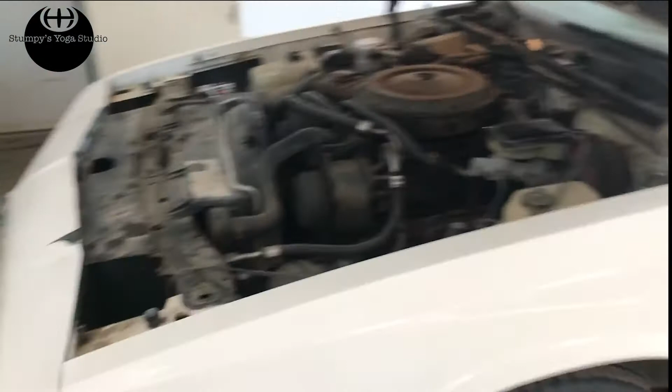Are you happy, Neil? I'm happy, Angus. Real happy. Oh, you can still hear it a little bit. But I think it goes away when it warms up. No, it's still running. Or maybe not. We gotta move it, then I can move my truck. And then you can put the car here.

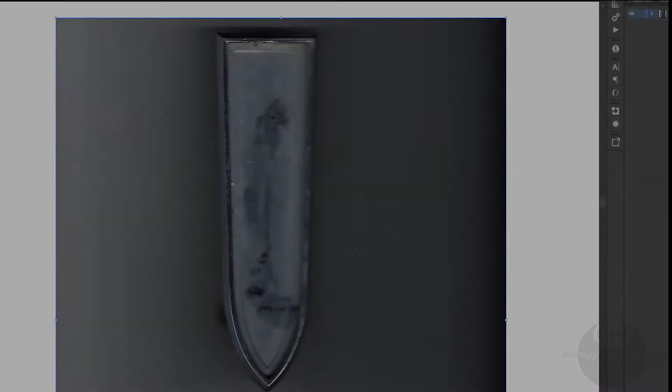This week we're doing something a little different. We're back at the computer again. What you're seeing on your screen today is that I'm working - that's the medallion of the front grille of the '64 New Yorker. I took it off when I was at the property last week, when me and my brother were working on his car.

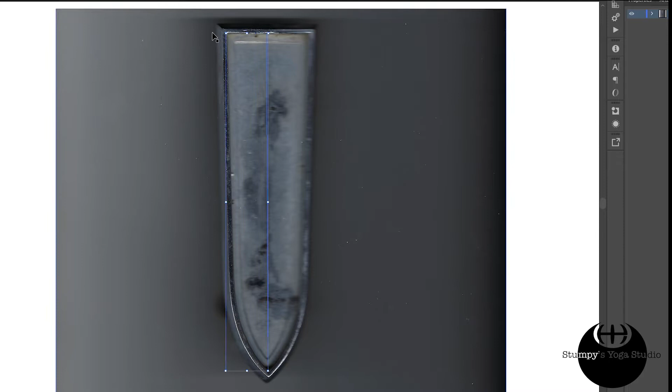I wanted to bring it back because all these medallions are missing the insert that goes in here. Instead of trying to track one down, which I think would be very difficult and rather expensive, I decided I'm going to try to 3D print one. So I'm not an expert at this yet, but I am working with it a little bit.

What you're seeing on your screen is me working in Adobe AI, Adobe Illustrator. What I did is basically take the medallion, put it in our family scanner on top of our printer, and just take a really rudimentary scan of the item. You can see some of it's blurred out, but what I'm doing now in Adobe AI is taking basically a shape of what I need, and I just took half of it because you can flip it and get a symmetrical shape.

So right now I'm in Fusion 360. This is the CAD software - there's a few other ones, there's SolidWorks and some other stuff, but this is the one I'm familiar with. I'm not saying it's the best, but it's the one I've gone the furthest with so far.

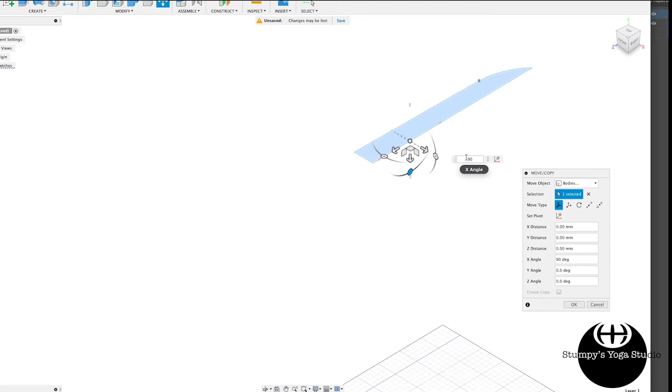This was my first cut at it, and I did a few - I'll show you at the end. I've done a few renderings of this, and this is probably not incredibly interesting for those who don't care, but I recorded a lot of it and I'm just showing you a little bit. Basically what I'm doing is trying to get this to the origin. There's probably a better way to do this too, but you're watching me suffer, and I actually have gotten better at this now since shooting this video.

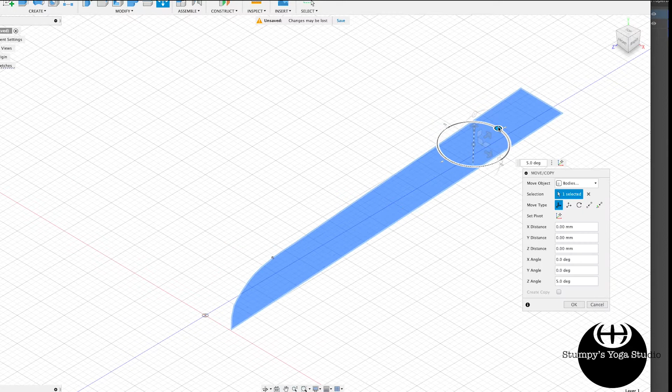So this is doubly hard for me to watch because I know how to get this thing home now. But starting on the home axis, everything's a little easier, I find, because it's that much easier to get things to center and such.

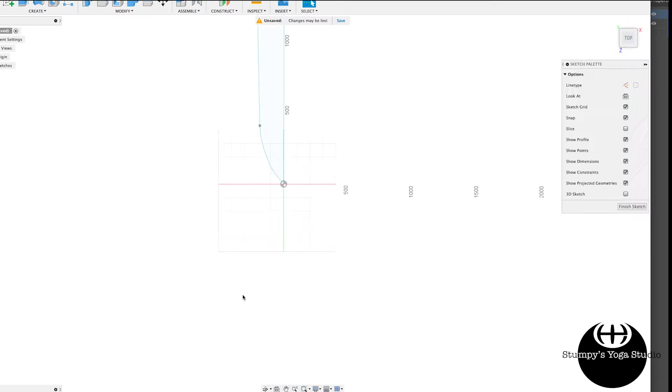Now here, I believe I'm making a mistake because I try to straighten the unit out and kind of twist it here. I think this has caused a lot of problems later, where that top line wasn't exactly lined up on the outside - it was not where it needed to be. But you'll see that I go through this.

I'm not an expert in this, but this is one of the reasons I got the 3D printers, to use them to build parts that I don't have or you can't get anymore.

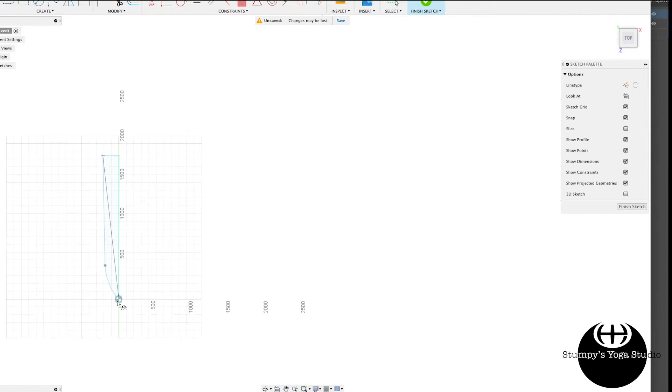I thought this was a good place to start because it's such a small part. The only problem is I've run into issues because the printer I have doesn't have that level of resolution, it doesn't go down that small.

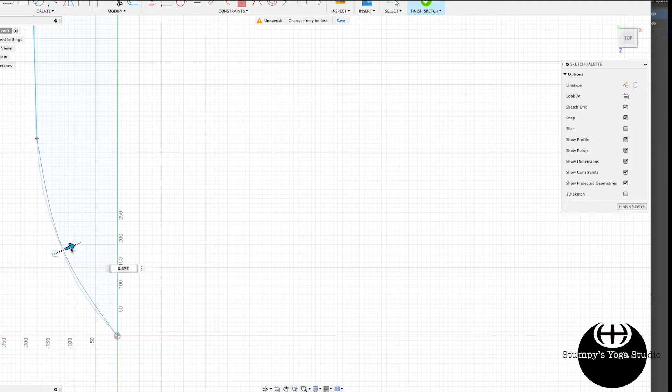Right now what I'm doing is trying to make a shape out of this, a sketch. I'm not sure why I couldn't use the actual sketch I imported as my sketch, but I'm remaking it as a sketch locally.

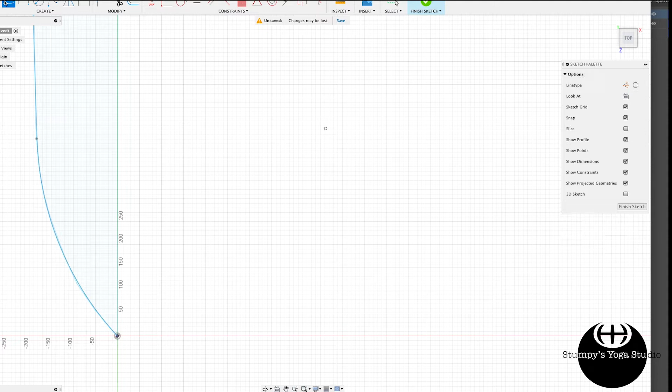I'm just trying to take the lines and get a sketch, and then from there we can start building solid objects. So this crown -- and you can play a drinking game to see how many times I say basically --

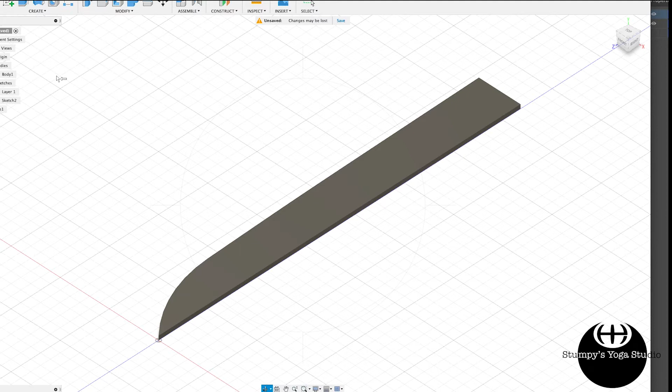this crest, if you will, has 3 crowns, and I guess at the time Chrysler had some 3-crown theme going on, and the New Yorker has it also. I haven't researched why. And then there's color -- the crowns are gold, there are 3 brackets that break everything up, they're silver, and the backing's red.

I've printed a bunch of these now, as you'll see in a minute. So that's the old version of it, I printed half of it, I'm just trying to get rid of it now. So there's 3 crowns and 3 brackets.

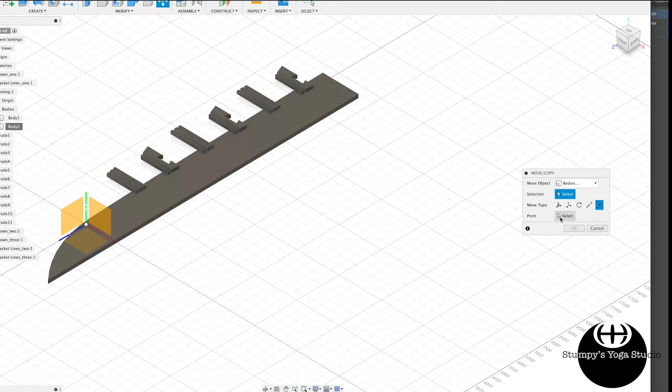So what I did is I did this once, didn't like the print, thought it was too fat at the bottom, and now I'm reprinting a new backing for it. So trying to import the backing -- there's the backing that I just drew. Now we have to move it to where it needs to be.

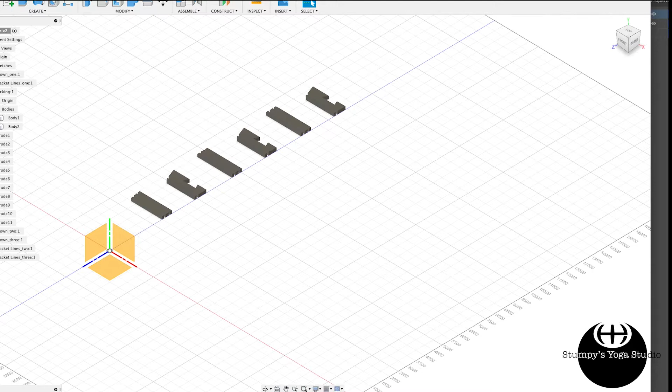As you can see along the left-hand side, you have all these different structures in your tree. So you have a hierarchy, and as you build things, they get added to it. I haven't really figured it all out, but I like that everything you build can be a new body.

The nice thing about the printer is it's kind of what you see is what you get. Whatever's on the screen, you render into the STL file, which is what it prints, or what it creates the print file from. Right now, because of the height of this thing, I'm just moving everything up.

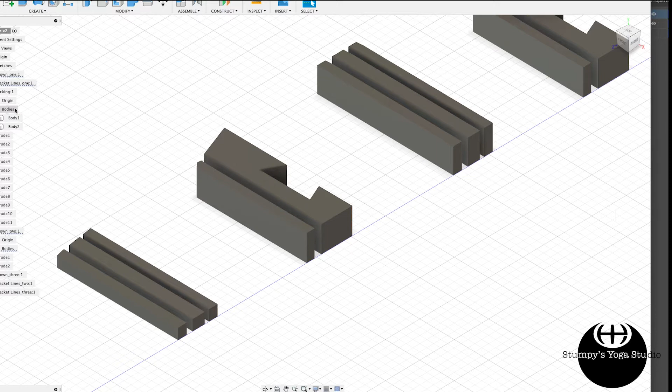The brackets, yeah, there you go. So you see how this is going to work -- the bracket's going to sit in behind it. So there we got our new bracket, or our new backing.

So I ended up printing one of these like this. I think I printed 3 of them like this, and I'll show you at the end how it turned out.

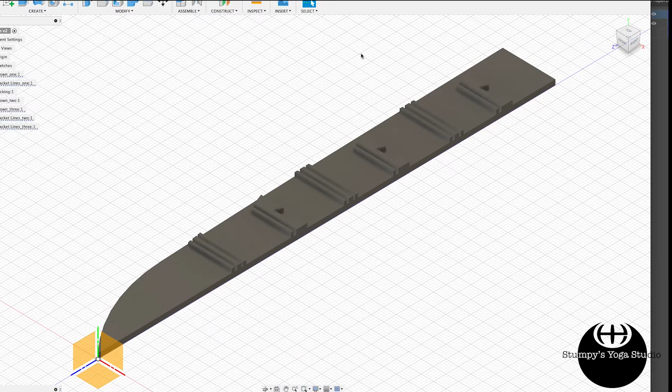Here I'm trying to move what I just drew to Ultimaker Cura. This is the program used to build the rendering for the print on the printer. This is a rendering of my printer.

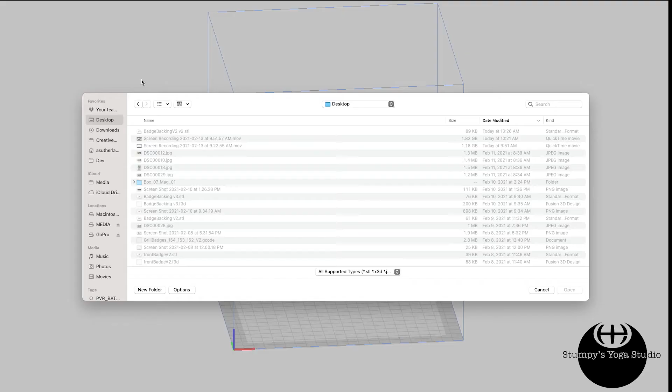I have an Anycubic Mega Zero printer. It's kind of an entry-level printer. I'm hoping to get a better one this year, but right now this is what I need.

You'll notice when it renders into the printer, it renders out of scale. I was working out of scale and then bringing it down to size because I wasn't entirely sure of the scale, so I was working way larger than I could. That way when I got to this level, I could scale it to what I want.

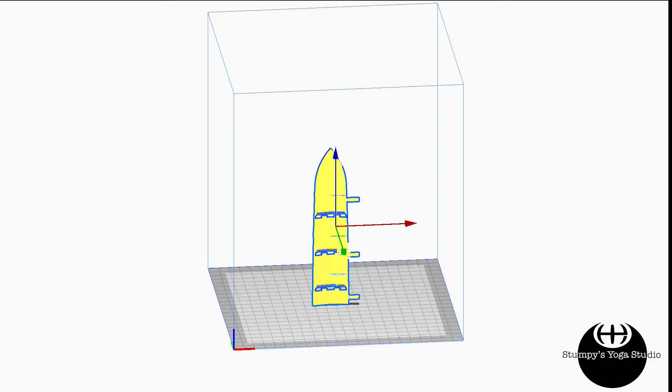I printed a bunch of prints, I'll show you later, that were just different scales -- 151, 152, 153, 154 millimeters tall, I believe. I think I went with 152. I might go a little bigger than that, try a couple prints at 152.5. So this is just the best way.

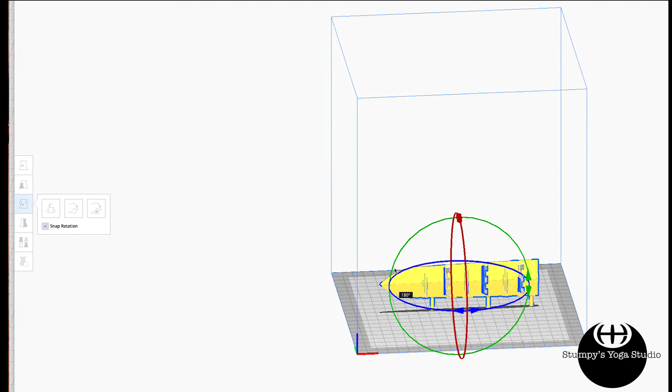So you can see I put those studs on the side of it that I'd break off later, because when I was trying to get it off the printer, I kept breaking it since it's such a thin piece.

It would break up, so this was not the way I ended up printing it. I ended up printing it pointed straight up like a spear. It seemed to print best, but I printed it flat once, and I printed it in half.

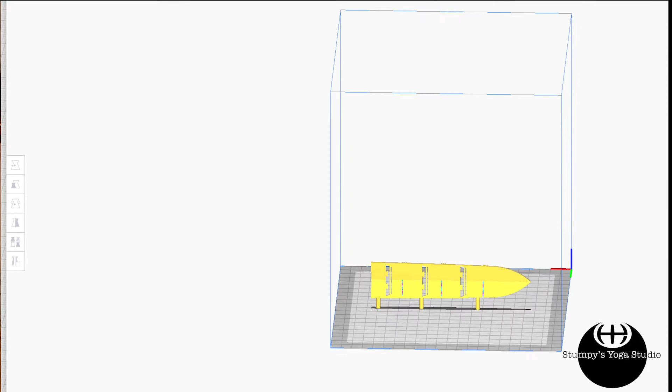I have a lot of prints here, a table full that I'll show you in a bit, but this is just showing the rendering of the print bed. Down in the right hand corner you see slice, and you give it the commands for how you want it to print, what kind of bed, what kind of heat, and all the tools. There's a bunch of default factors depending on material.

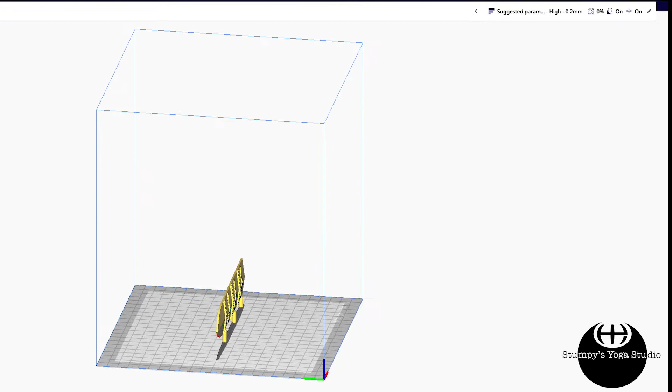I'm using PLA, so there's certain things you have to do. This is when you hit slice.

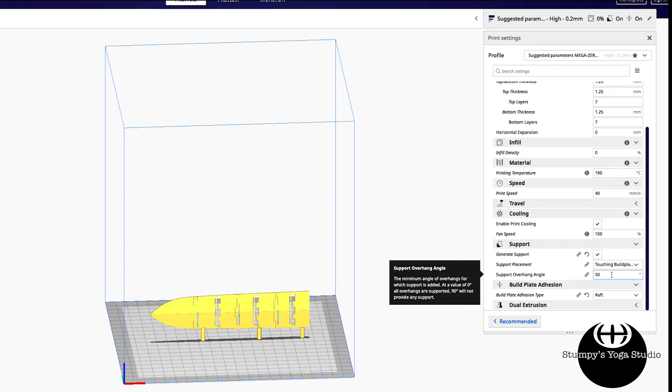So this is the suggested parameters: speed, travel, supports. If it's on your print bed, it'll decide what it needs to support so it can print, so it's not printing in midair — it'll build up to what it's printing. The adhesion to the build plate depends on what you're building, so there's a raft, there's brim, and a few other things. Then you hit slice, and it creates a print for the printer.

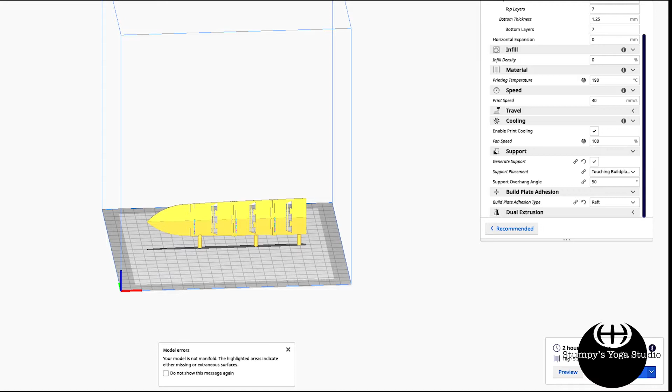You can save it to a removable disk and bring that disk over to the printer, and off to the races, like you'll see right here.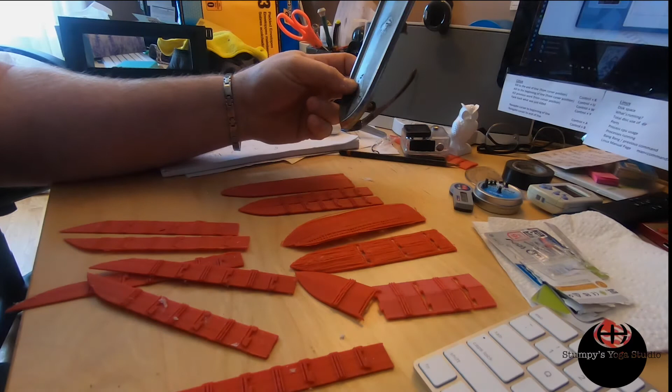So I just wanted to go through these. This is what we started with here. This got pulled off of the two-door New Yorker front clip, and it just bolts on with 4 of these.

So originally I just stuck this in the scanner over there, face down, and got the lid on as best we could, and that's where that first image came from. This is kind of what we started with — this is the first one you saw me draw, and I'll show you here.

I wasn't really impressed with the fit, so this is why we redid it, because this area here was really bad and just too flat. You see how it's got that arc in there, and it's just too flat.

So we stopped doing the full cuts and I moved over to doing these half cuts, like this one here and this one, and I just did a whole print of just half cuts. This is not the right red, but this is what I was doing.

So I did, I think this one was a half cut here. And again, just way too big, eh? Just... so I figured this is from here.

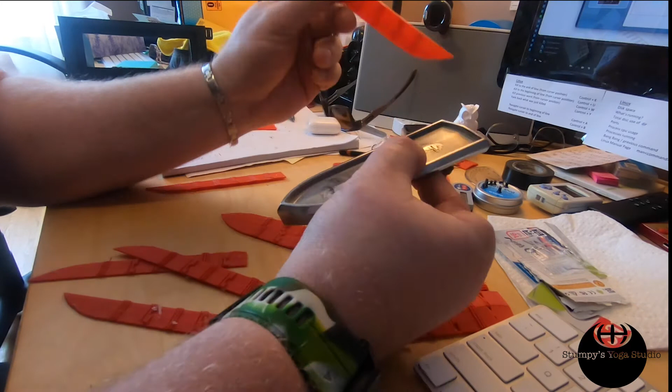I think it was here to here. It's 152 millimeters, or 152 millimeters — not sure that's right, but that's the number I went by. It might be that number. I think it's that number to that number. 152 millimeters.

And yeah, this one wasn't even close. Then we did this one here. I think I did a 154, a 152, and a 151, so we ended up with the 152. This is pretty close right here.

And then, again, this is the 152, no, this is the 153, and it's just a little too big. The nice thing about doing it in a bigger size and then cutting it down, or just doing it at the Cura level, scaling it to what you need, is you get more detail and can scale as you print.

So again, I think this was a 152, but this has ended up, and what else I figured out is I didn't have this flipped out enough. That's why by the end I start turning them out a bit, to get that angle where it kind of goes that way.

This is starting to get better. This is a really bad print. I printed this one flat, and it just didn't work. That's the other one, like I printed these. I printed this guy, I believe, like this. And here's one here.

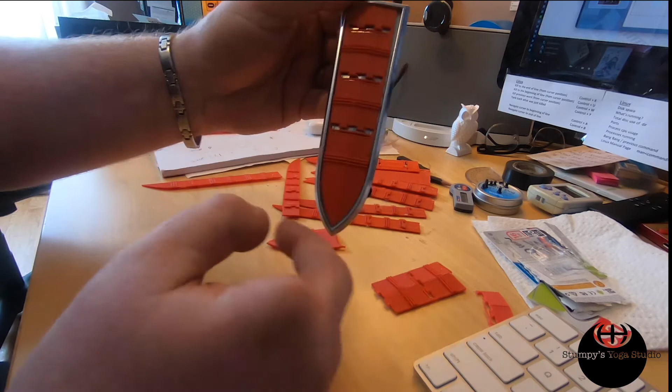And then I got to this one here, and again this area at the top. So then this one just didn't print at all. A lot of time goes into this, because these all take at least 3-4 hours to print. And this is where I started getting happy.

I realized real quickly that I'm not going to be able to do it like this. I want to do the crowns as an insert, and just with this bottom bracket here, it's going to be too small. So I'm going to do these as separate prints. This will be a print, this will be a print, and so on. That way I can print them all in their colors, or lack of colors, and then just glue it all together, epoxy the whole thing, and sand it, so it'll have that kind of closed-in look.

So I like the depth, I like the angle. I didn't like this, and we finally got to this guy. I broke it up because I was playing around with it, but this is kind of where we got to, and I'm really happy with this one. Little things like these cuts in the middle, and of course the crowns won't be on it.

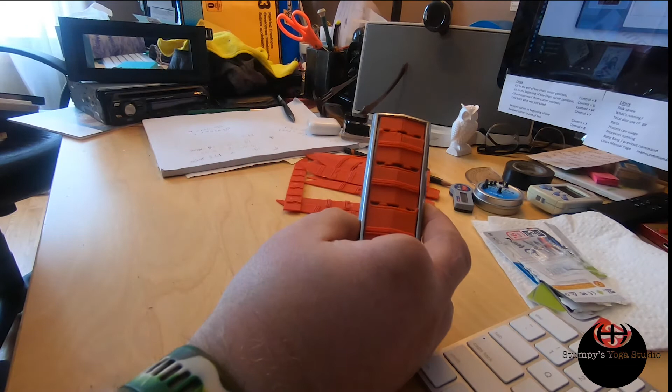So again, we got a little bit of gappage around it, and I don't think that gappage is there when it's fully assembled, but this is kind of my final print on that, and now I'm just waiting on the right colors. Yeah, this is everything we went through to get to the point where we got something I can live with. So that's the pile of badness. But in the end, we got to something, and the other thing was getting this angle right.

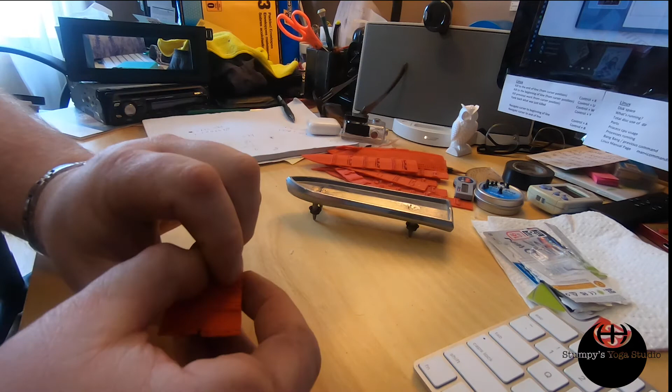So this is the closest I feel like, if you look here, covering this indent here. So that's where we got to, and I just now have to go over the right colors, and then we go through the process of epoxying this.

Nice thing is, when we're done, I can print as many of these as I want, and then have them on file. I can put them out to the world, and people can have them, because this is just not available anywhere I've found. I think probably there's maybe a guy out there building them by hand, but I'd rather do it myself at a certain level, so I have control over it.

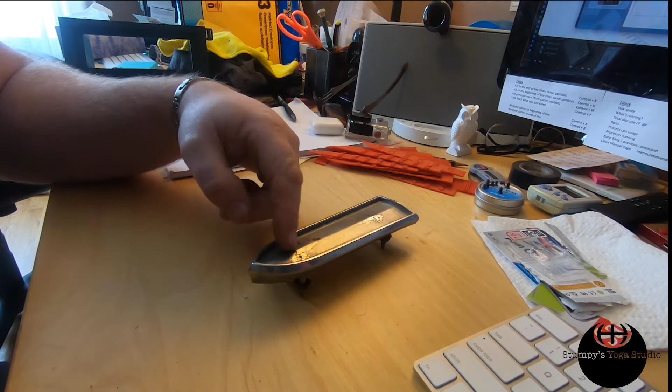And I don't want it to be absolutely perfect, but I want it to be something to be there. I think on one car, somebody just painted the inside red, and I don't know how many of these are still in the wild, because I think a lot of them just fell out going down the road. So they're probably along highways somewhere. So yeah, that's where we got to.

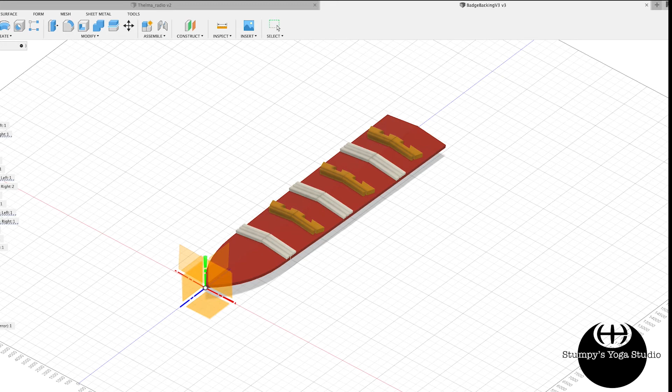Just want to talk a little bit about the project and how it exists now. So this is me and the tool again, and this is where I've gotten to with it. This is the rendering I like. It's not perfect, and I can move things around a bit, but I can print.

So I'm going to print this. I was going to print it with openings for the crowns and openings for the brackets, but I'm going to print it piled on top of each other. So I'm going to print the backing as one, the brackets as another one, and the crowns as another one.

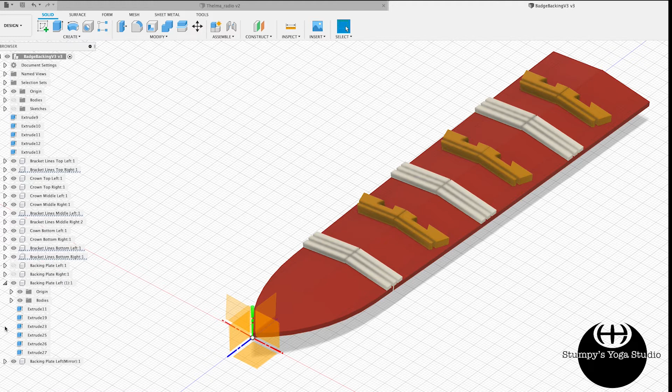So if I can just show you how the tool's set up now, you can see on the left-hand side there, I got the hierarchy and everything named correctly now, so I really know what I'm looking at any given time and what I'm editing. Everything has its own name: bracket, top lines, crown middle, crown left, crown right.

And see, if I click on them, I can make them disappear. Obviously, I had a problem with that one, but yeah. So you can kind of see I can work in different areas of the tool.

I like having it on the left and the right. That way, if I change something on one side, I just delete the other side and copy and flip it from what I fixed. That way you're not doing things twice and trying to fit something to what you've done already. But yeah, every part of this is a different part of the hierarchy, altogether.

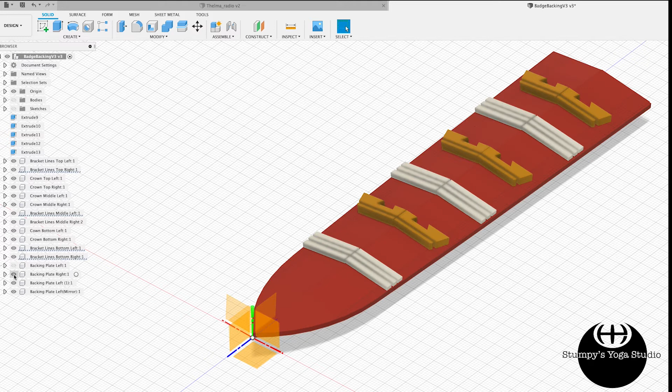Like right now, if I did a rendering, an STL file of that entire thing, it would print just like that. Probably one color because I only have one extruder. But as I make stuff disappear, it's what you see is what you get. So if I decided to do an STL of that right now, that's what I would get. I would get all these things.

So we're going to do one print as the backing, one print as the brackets, and one print as the crown. And I'm pretty happy. Those colors are obviously a rendering.

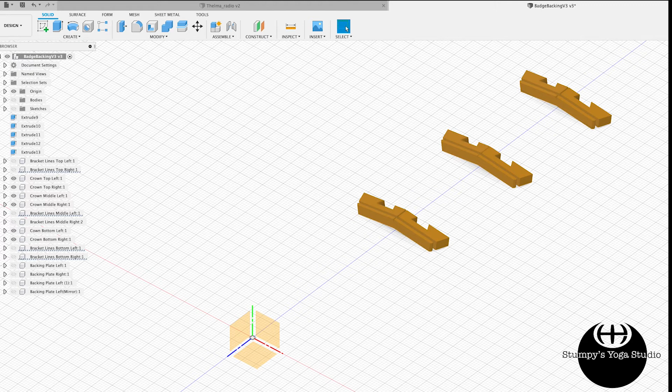But I do have the PLA colors I picked out because I don't like the colors I have now. That red is just too cartoony red, and I have a yellow, but it's a yellow. And I thought to myself, you know what, I bet you there are some colors closer to this.

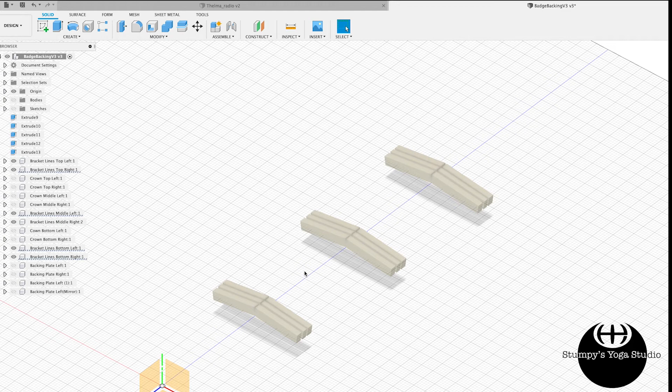Now you can see, yeah, I can print just that. I can print just that. I can print just that. So what I'll end up doing is just printing those three together.

What's this guy doing? Yeah, so I can print just that if I wanted to. And that's an option too.

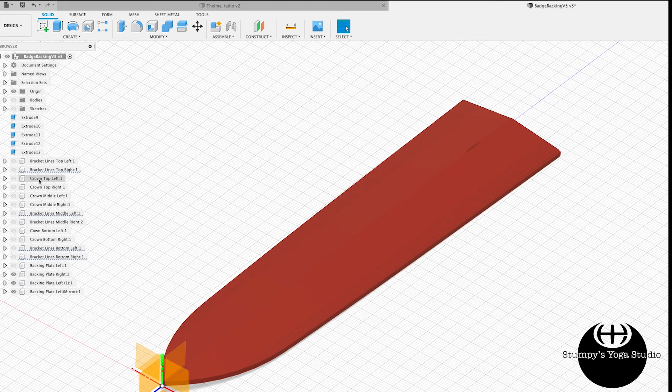I could print it just like that and just tape off the backing and paint the colors I want, just spray them. So that's an option too. Yeah, you can print just the backing. So that's probably what I'll do. I'll print just the backing, and then just the brackets and just the crowns.

And then glue everything together. And then the whole thing will be in an epoxy, and then I'll sand the epoxy so it's like glass. So you'll see it through the epoxy. I am a little worried about the thickness of this thing. I might have to cut down on that, but now I have that.

So see, this is the colors I'm going for. This is the gold I like. Right there, that's the gold I like. And I think I'm going to go clear. Part of me wants to go clear for the bracket lines.

I'm a little worried about the red showing through the back, but I don't know. It'll be close. Maybe clear on a white or a silver. But that's the only one I'm not clear on. And then a dark Roman red like this for the red.

And at that point, I think I have the correct colors. I just don't have those yet, so I'll have to do a print when I have the colors. But I'm pretty happy where I've got the rendering too.